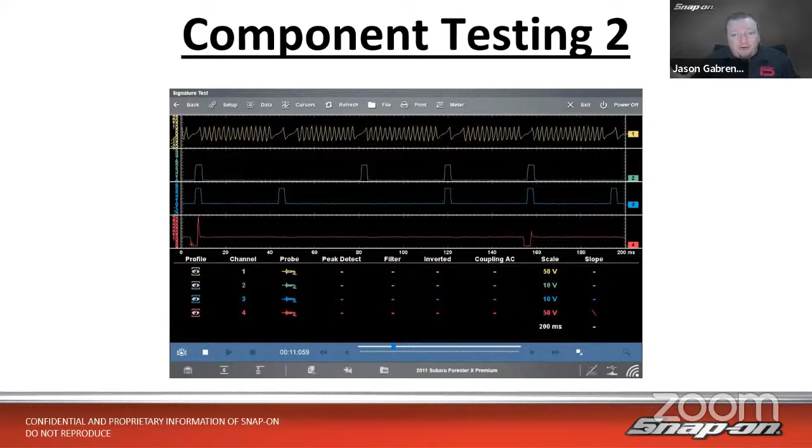So for this portion of the class, we're going to talk about a case study. We have a Subaru here with a flashing check engine light. The customer complaint is under hard acceleration, such as maybe merging on a highway or climbing up a steep hill, steep grade, 100% throttle, 100% load on the engine, the light would flash. Cruising normally though, if we're hanging out in the left lane or whatever, just part throttle, 65, 70 miles an hour, whatever it happens to be, no engine light present at all. No other drivability concerns with the car. Even when the light is flashing, the customer doesn't even notice anything's going on. It's just they see the lights flashing, and that's concerning for them, and I can imagine why.

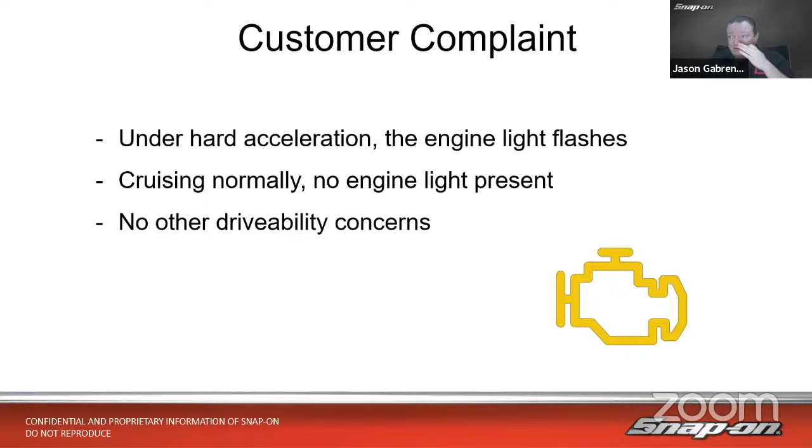So what is a flashing check engine light? It's a catalyst damaging event, usually a misfire when that's concerned. So we've got to take a look and see. Let's diagnose this vehicle and see what's going on here.

So the first thing we're going to want to do on any vehicle, if we have the ability, is we want to be able to code scan, do a scan of the entire vehicle, check the whole vehicle for codes, see if there's codes in other modules that don't have lights with them or something of that nature. So we see right here with the engine, we've got history codes, we've got a cylinder 3 misfire in history, and that would be why no engine light is on. It's in history, it already happened, but right now it's not going on. So it was in the history, and they'd driven it long enough to get it out of current and into history. So cylinder 3 misfire.

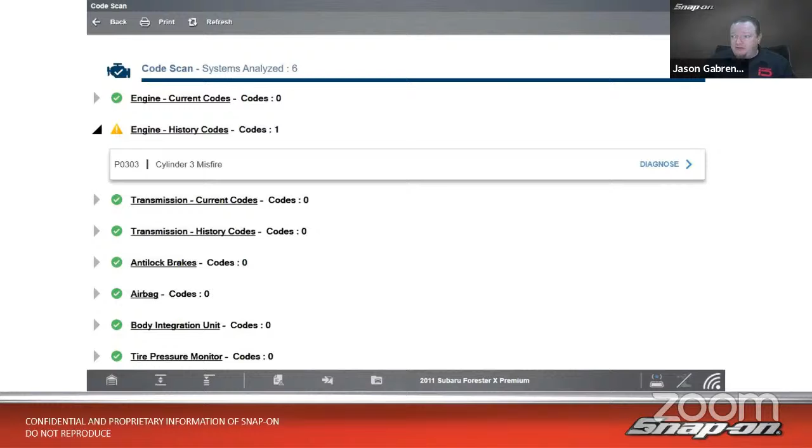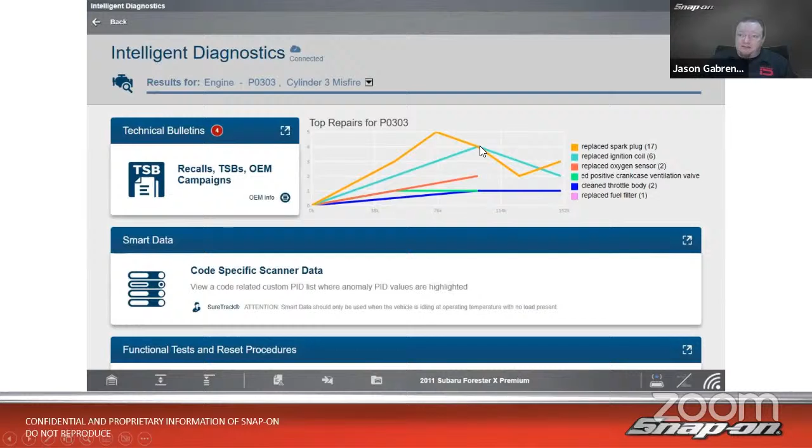So we'll select diagnose here because we were using this on a Zeus, and that has fast track intelligent diagnostics. So that should help us out a little bit when it goes to diagnosing the problem. You can see here's the landing page, and it looks like we have 4 TSBs. Now we want to use the fast track intelligent diagnostics page like a book. It's going to be a repeatable diagnostic workflow. So top to bottom, left to right, I want to be able to touch on everything on this screen, and it's going to walk me through a diagnosis. So first thing first, top left corner, it's going to be my TSBs. There's 4 of them, so we're going to click on that.

And why in the world would it cause a drivability problem or misfire or something like that? So here's a close-up look from further on in this bulletin as to what it looks like. So here's the cam sensor. It's got just the connectors up there. It's got one bolt that holds it into the timing cover. Got the timing chain cover right here. We got a little rubber O-ring, which sits in, and then it has this metal disc on the end of the camshaft that it reads.

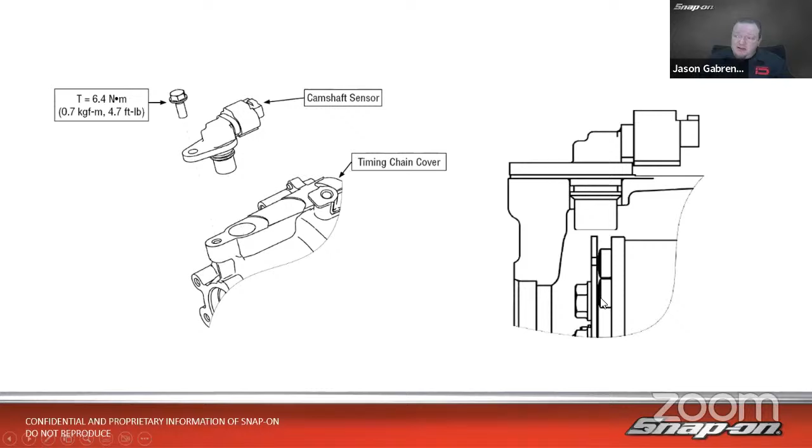So it's going to have different notches in there, depending on what cylinder's where. And you notice that there's an air gap. So under normal circumstances, this is our sensor right here. This is our wheel. So it's going to have 3 notches and then a blank or no notch.

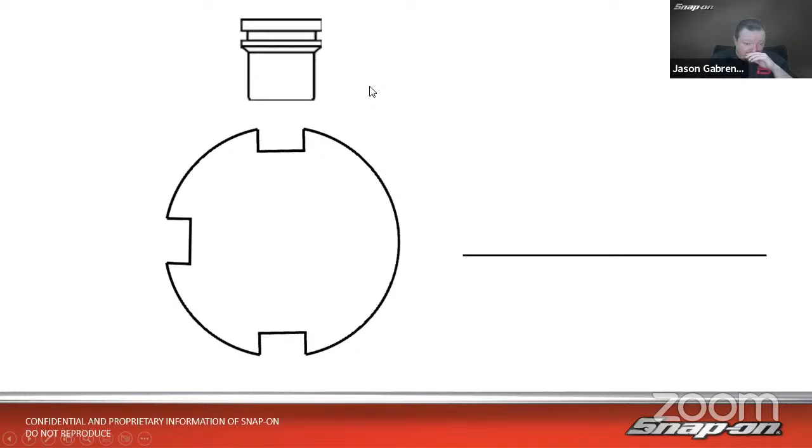The cam sensor on this vehicle is going to be a Hall effect type sensor, and it's a 3-wire sensor. So it's going to put out a digital square wave in this case. It's going to have power, it's going to have ground, and it's going to have a signal that goes back. So when it's powered up, it is going to generate a magnetic field.

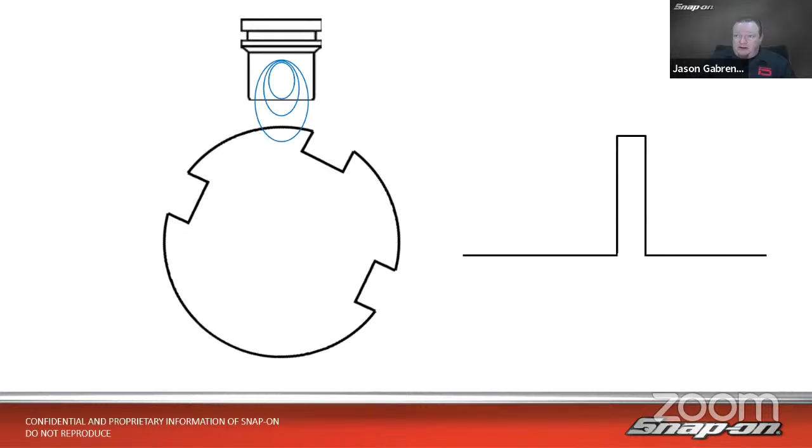Now, this isn't 100% what a magnetic field looks like. I can't really draw in 3D, but you kind of get the gist. We have these loops and these waves in here. So it's a little coil of wire. We run electricity through it, run current through it, and it generates a magnetic field. As it turns, as that disc disrupts that magnetic field, it's going to create a pulse.

So there's my pulse right there. And judging on where this pulse is and how that pulse lines up, that's what creates the signal. And that's what sends the signal to the computer that says, okay, here I'm on cylinder 1. Cylinder 2, what cylinder needs to fire next.

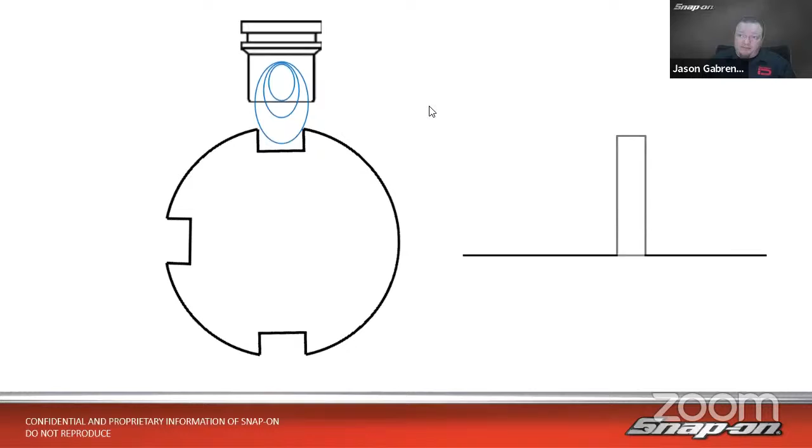However, this is if all is well and good. However, if we shrink that a little bit, we get it a little bit closer. Now the air gap is too tight, and you notice how this outer ring here, just like I said, it's just a drawing, an example, but you notice how it's intersecting that disc in a different way. So it's causing that magnetic field to change in an unexpected way. And the computer freaks out a little bit and doesn't necessarily know what is what and what's going on with the vehicle.

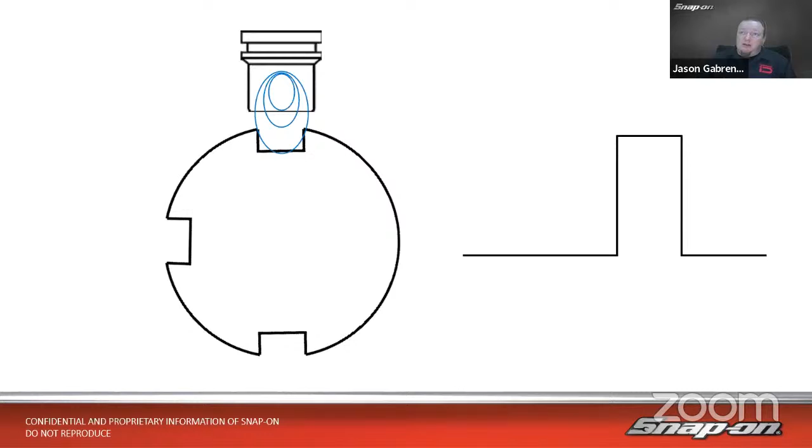So how do we figure this out? How are we gonna test this? Well, we're gonna want to test the component. Now, in this bulletin, you read through it, one of the first things it's going to show you is this pattern. Now, this is on a Subaru lab scope, but any lab scope with 3 or more channels will be able to show you the same.

Channel 1's a crank sensor. Sorry, that's an analog sensor on this car. It's not a Hall effect sensor. It's going to have an up and down analog. On channel 2, it's going to be the right side cam sensor. Channel 3 is the left side cam sensor. So it is a horizontally opposed engine.

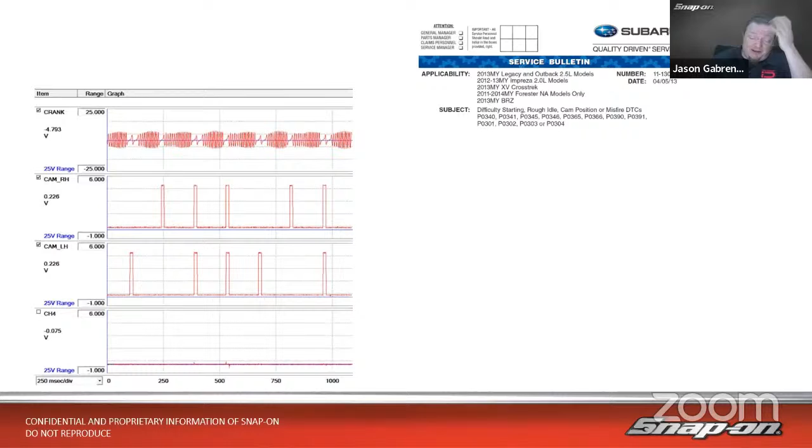So we have 2 cam sensors. If you look right here, there's a double gap, a single gap, a double gap, a single gap, and so on. So on one side of the crankshaft, it's got 2 pieces missing. And on the other side, it's got 1 piece missing. So that's way the computer knows I'm on top dead center or on bottom dead center, or 360 degrees or 180 degrees off.

So it's either one side or the other, and then you'll see there's a gap. When I have a double here and a gap there and a single there, that's one combination. If I have a single and a gap, that's another combination. If I have a double and two gaps or two blips, that's another combination. And a single and two gaps, two blips, that's another combination.

So based on these combinations, the computer knows when to fire what cylinder. So if I see this one, I fire this one. If I see that one, I fire that one. If you were to draw a straight line through all those, I think you'd agree that they all line up.

So this is a rare instance where a manufacturer actually decided to provide a known good cam crankshaft correlation waveform. Doesn't always happen. When it does, it's a wonderful thing because then we don't have to go searching.

Go a little bit further down into the document, and then it gives you this pattern. Now you see it's only on one cam sensor. You see I got the regular blips, and then I got this big one right here, and I got this medium-sized one there, and I got this little bit bigger one there. But the three regular blips still show up.

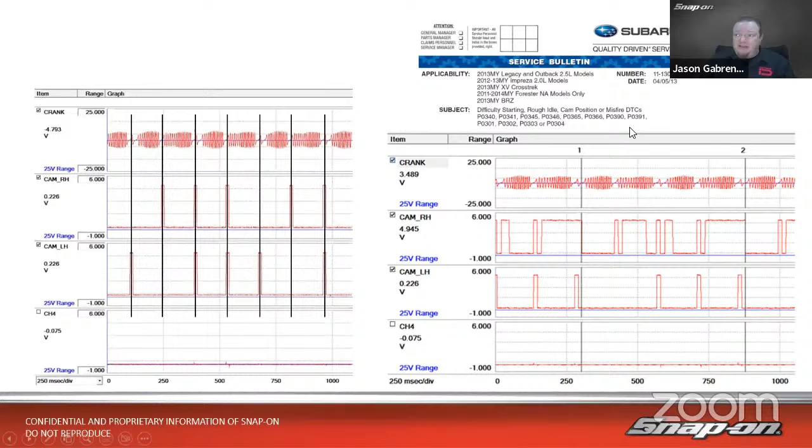You'll also notice on this larger blip, that is getting into where there's supposed to be a gap. So according to what the computer's seeing, it sees single blip, blip, double blip, blip, single blip, nothing, double blip, blip again. So it doesn't know what cylinder is what. So it gets confused and it just fires the same cylinder multiple times, or it doesn't fire other cylinders because it doesn't see that. So that's a problem, and that's why we would have this issue.

So next thing I want to do is, well, let's hook it up and let's test it and see if this car has this problem. So we're going to go into guided component test, and you'll see they do list a crank sensor, cam sensor, and ECM, and so on. The nice thing about Fast Track Intelligent Diagnostics is it narrows down all the tests on the vehicle just to the couple sensors that might be what we need.

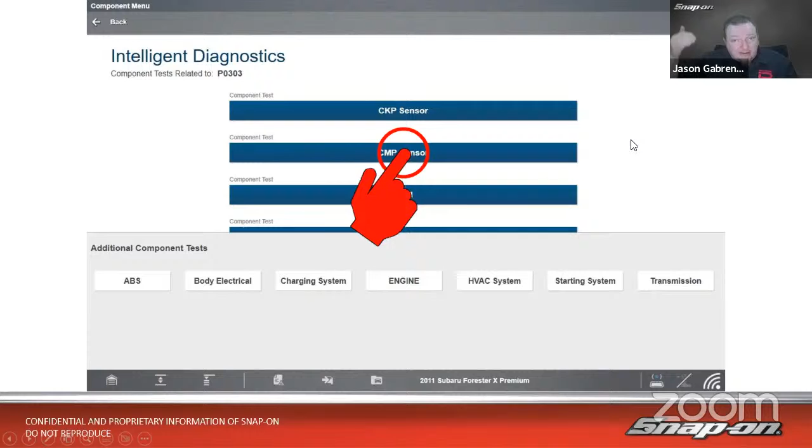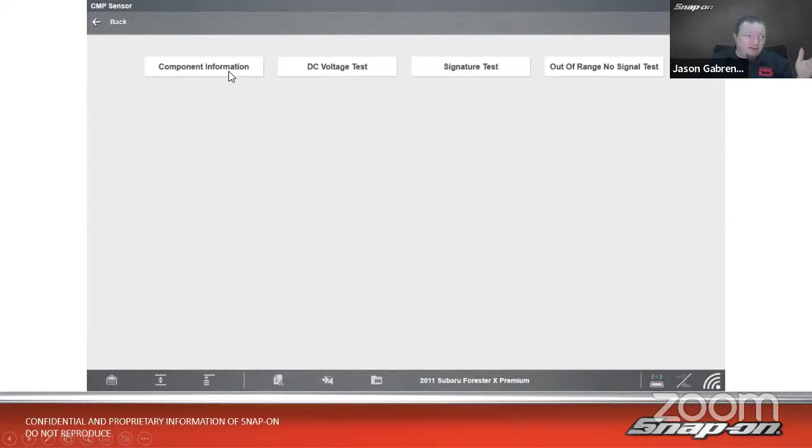So first I want to check those cam sensors because we said the gap is close. So if we see that pattern where the gap is off, then we'll know we have a problem. So we're going to go in here. We could read component information about how it works, but I just kind of told you how it works right there.

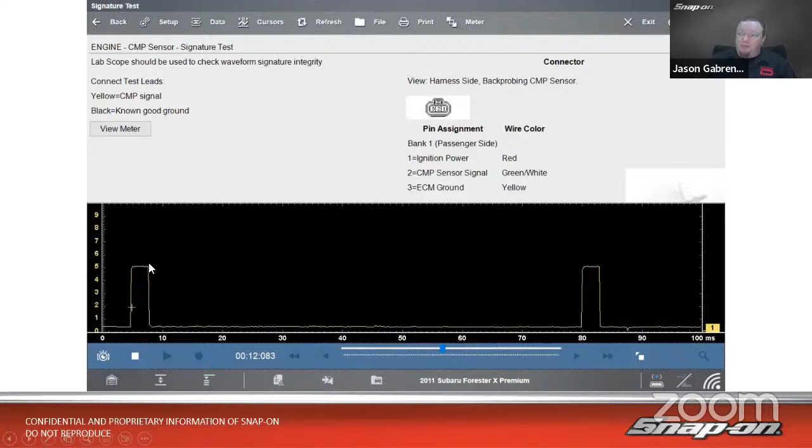So we're going to go into the signature test. In the signature test, you take a look and it may look good or it may have a gap, right? In this case, this one does not have that problem at this time. So we see we have a blip and then a gap in between, so it doesn't have that problem.

Let's look at the crank sensor too. I'm going to pull that up. And then we see the crank sensor looks normal as well. We have a double gap, a single gap, double gap, and then we have that analog pattern back and forth.

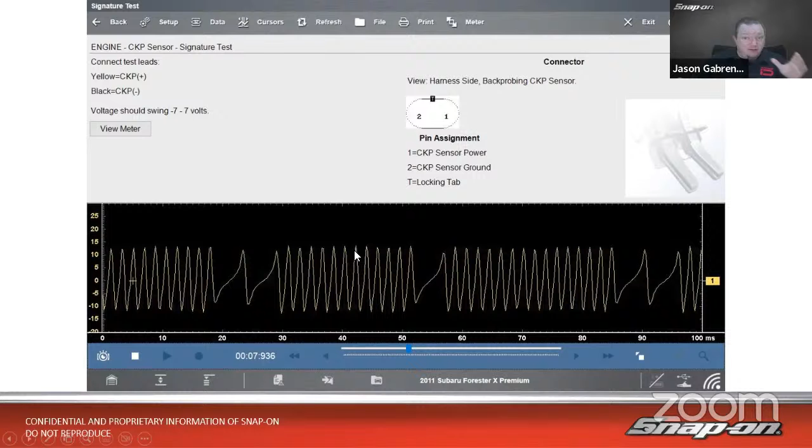Now I want to be able to compare the two on the same screen, so we can do that as well. If we go up to the meter, click on that, and open up, makes it a little bit bigger. If we come down here on the bottom, we can open up the extra channels where we can open up more channels on this scope. So you can see I have 3 right there.

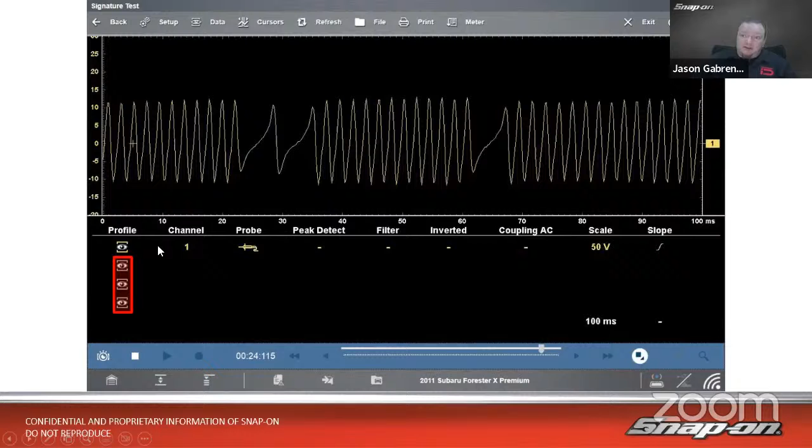Going to open up. Now I have my two other cam sensor channels there. So I have a crank sensor on channel 1, channel 2 is one of the cam sensors, channel 3 is the other cam sensor. And I can see how they line up. So I have a single, a gap, a blip, single, blip, blip.

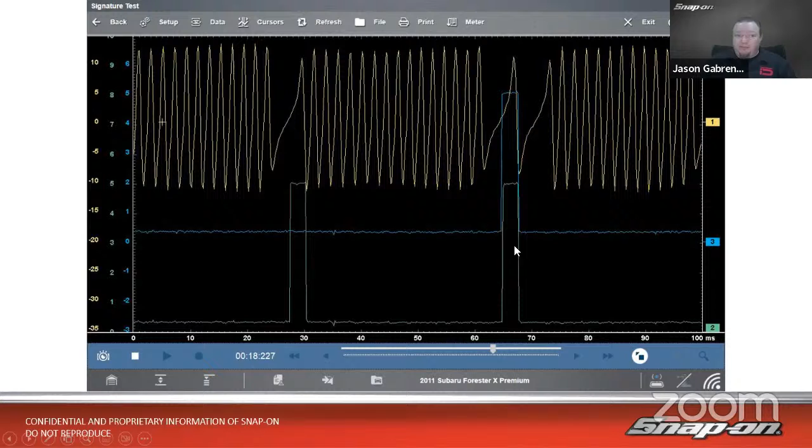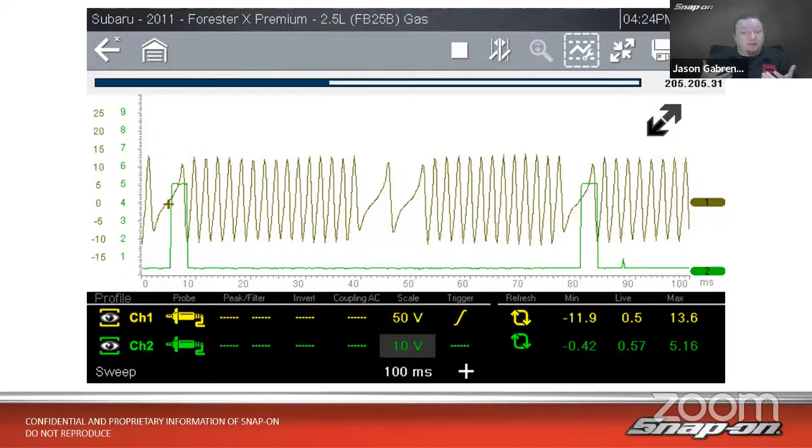Could also do this on a 2-channel tool. This is on a 4-channel tool on a Zeus, but I could do this on a 2-channel tool as well. I just have to look at one cam sensor at a time. So if we know we're looking at a cam sensor problem, we can do one cam sensor at a time, or both cam sensors at the same time, just without the crank sensor, making sure everything lines up. We can do that too.

Went one more step further because I wanted to be able to see one single pass of the firing order, so I added an injector. So the injector fires lined up with all of these things. So if I use that 4th channel as an injector and with the trigger point on that, it's going to base everything off of that time-wise.

And that's one of the important things. If I'm using multiple channels on a scope, I want to have them all on the same time base because I want to be able to see and compare and not throw my brain off, I guess, if I have different time scales going.

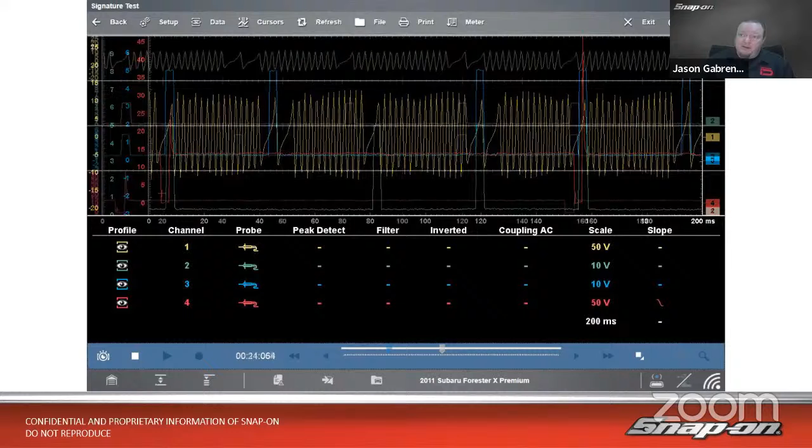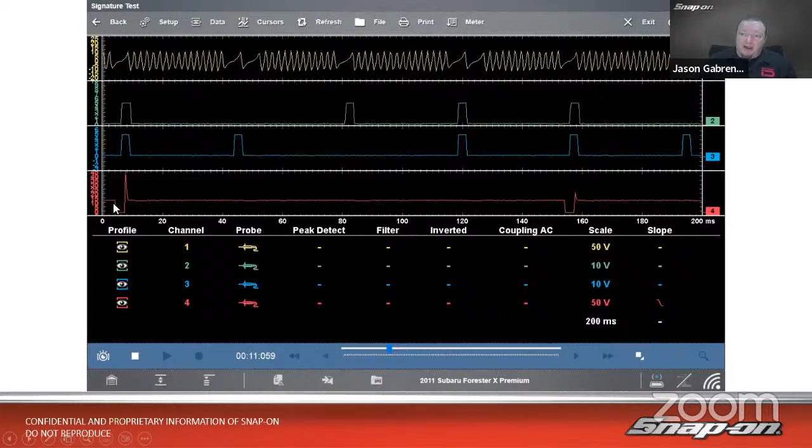When you're comparing multiple channels, you want to have the same time base on all of the channels in order to have that comparison and not have it skew your information. We can take it one step further and separate them out, kind of like Subaru had it already. So we have the crank sensor there, one cam sensor there, and my injector pattern right there. I could take it even another step further and open both on the same screen at the same time.

If I have a Windows-based tool, I can open the cam sensor on one side and have my information on the other side. In this case, we have our TSB still open, and we can do that all on the same screen, all at the same time. So that is the use of multiple channels.

Now let me back up a little bit. So we tested it and saw how it worked. And how do you fix it? How do you fix this problem? I shouldn't just leave you hanging and say here's how we figured out the problem. We don't know how we fix the problem yet.

So what happened is this was the first year of that engine for Subaru, as I said. And what happened is when they machined those surfaces on the cam or the timing covers, they machined a little too much off, so it brought things a little too close.

If the gap was very, very tight, you'd have starting problems, lots of drivability problems, hard start problems. In the case of this vehicle, it was just barely on the edge, like it needed a 1/10 of a millimeter shim. Under a load, when things move, it gets a little bit closer and throws the problem. Driving down the road at just part throttle, it's got the right gap, so we don't have the problem. Just right on that edge, if there's enough stuff moving in the timing chain, with forces moving around, it gets a little too close under a load. Not under a load, it's fine.

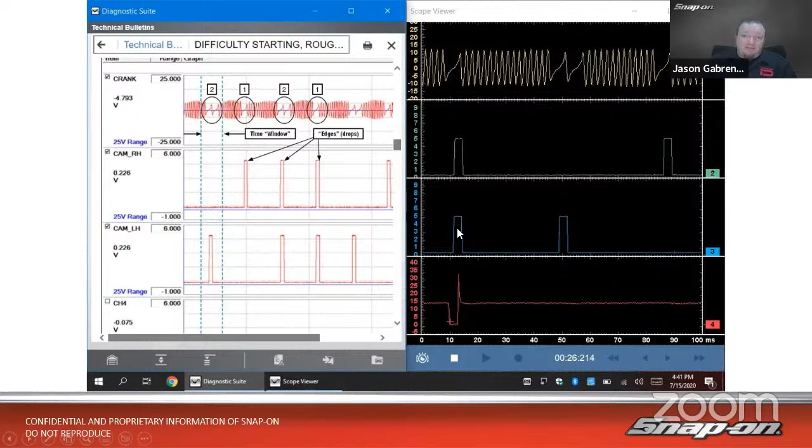So in this case, that's what happened. You put a 1/10 of a millimeter shim in there, and you're good to go. I just thought that was an interesting, good example of multiple channels and how we'd use that. So that's what we're going to talk about now, how to do that.

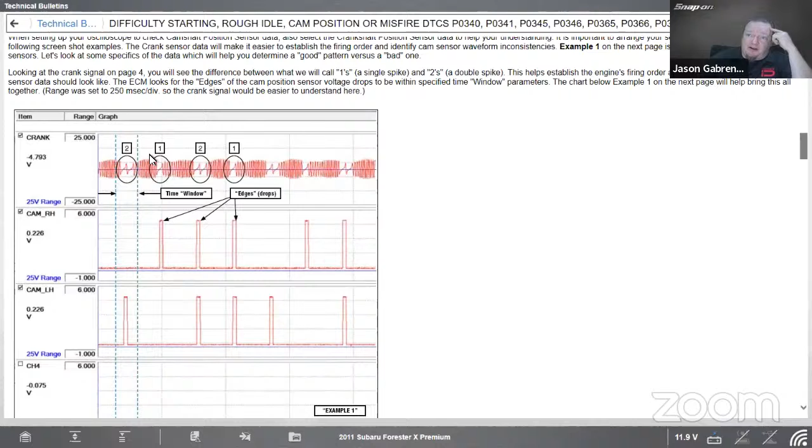Special tools I need: depth gauge adapter if I need it, or if I don't have certain things, the washer there. There's my known good pattern, and it talks about this double gap and the time window we need to have a pulse occur.

That's where we said if it got screwed up. Right now it's pulsing the way it should, so it would be 1, 3, 2, 4 is the firing. So if it sees a certain combination, it's going to fire that cylinder. If it sees a 1, a yes, and a yes, then it fires number 1. If it sees a 2, a no, and a yes, then it fires number 3, and so on.

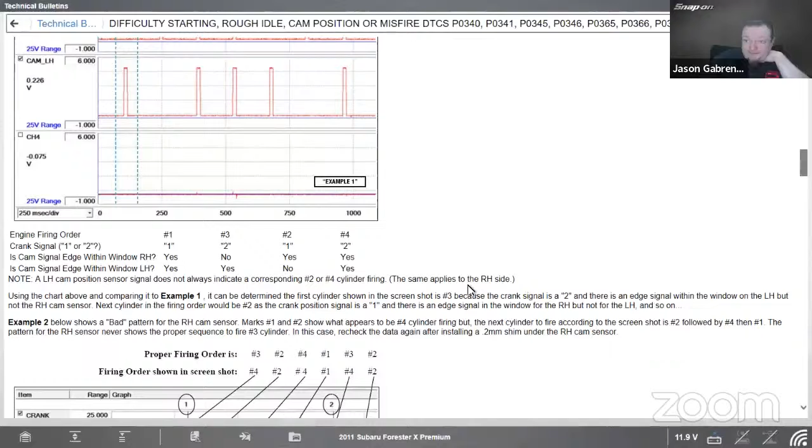When we have the problem, we see the erratic signal - we have this extra signal there. It should be shooting 3, 2, 4, 1, 3, 2, 4, 1, but instead it's 4, 2, 4, 1, 4, 2, 4, 1, not even firing cylinder 3, and it's getting the signal to fire cylinder 4 twice. That's why we have a misfire problem.

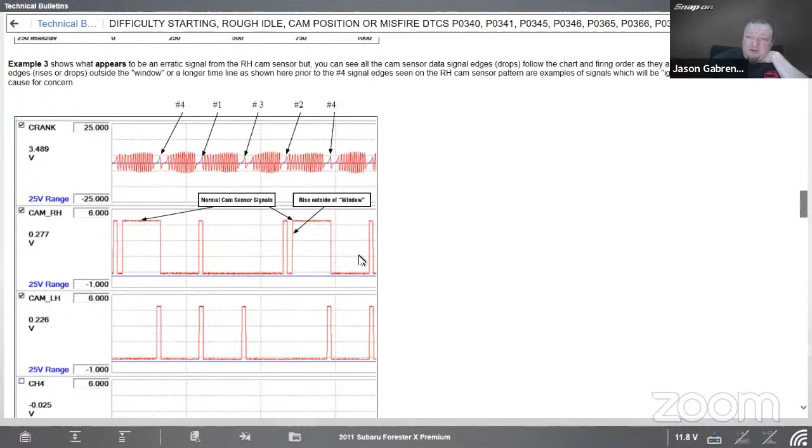It appears to be erratic, but it's not. In this case it looks erratic, but it's still okay because it's just outside of the window. So it still works - it's still not right, but it's not bad.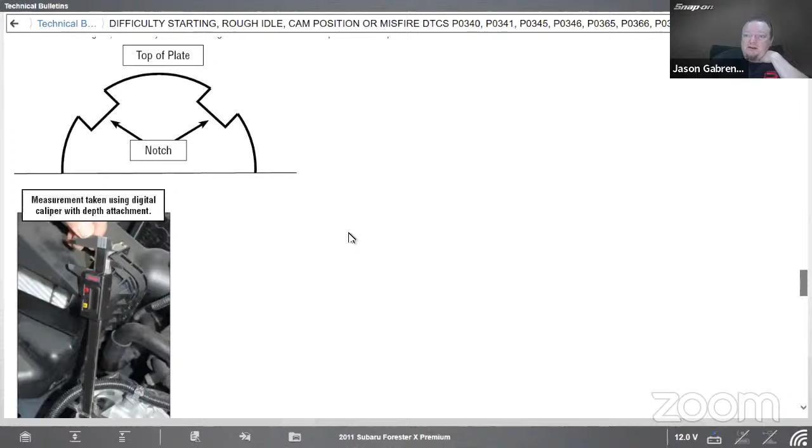If we come down here, we can see the cam sensor, and we can see the shim where the shim gets added in there. Make sure that our depth is correct. Top of the plate - there's the notches. We want to take the depth to, not the notch - we want to take it the other way.

It's going to tell us how it works. Do a little bit of math, and so on and so forth. So it gives us the time down at the bottom.

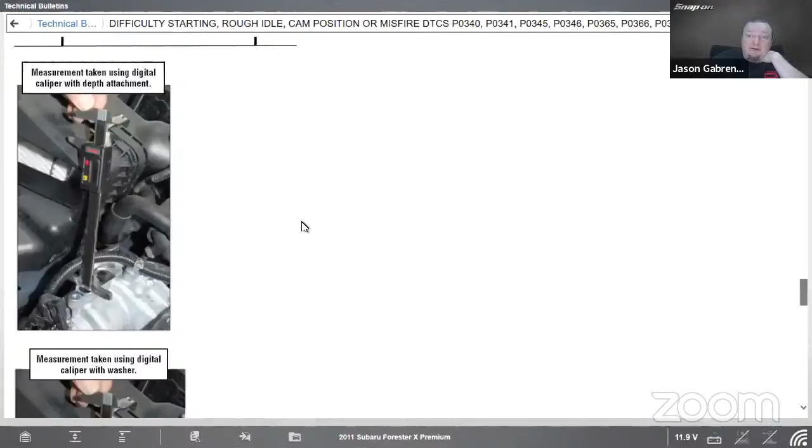All right, so here's my known good pattern. Now I want to be able to have this on the screen, and when I'm done going through this procedure, I want to have my cam and crank pattern on the right-hand side so I can see that going back and forth.

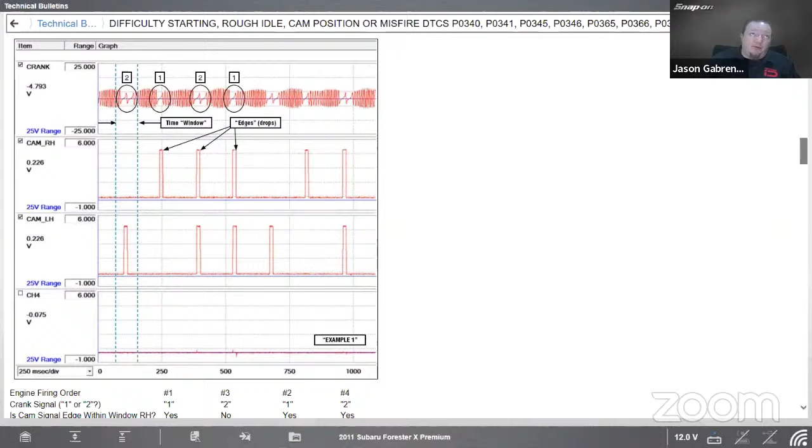To do this, since I have a Windows-based tool and my TSBs are in my scanner, I'm going to leave that going. Go to the home screen, go to my guided component test. Load my vehicle, I'm going to engine. Once I load the engine, it's going to list all of the components or subsystems that I can test.

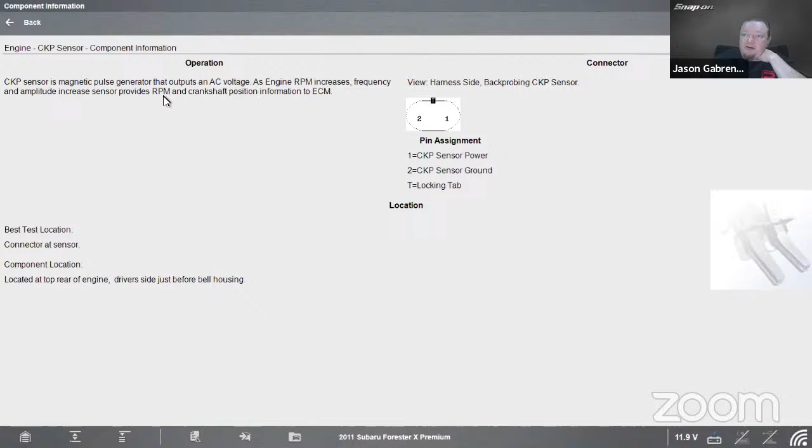In this case I want to start with the crank sensor. If we look at component information, it's going to tell us it's a magnetic pulse generator that outputs an AC voltage. As engine RPM increases, frequency and amplitude increase. The sensor provides RPM and crankshaft position to the ECM.

Back up a little bit, and we go to the signature test. So we connect yellow to crank positive, black to crank negative, and it should swing -7 to 7 volts or more depending on RPM and such. So we're going to have our sensor go, and we see it's about 7 to -7.

There's my crank sensor - I see a single window, I see the double window. Everything's there, everything looks the way it should. So it should swing -7 to 7, or about -7 to 7, maybe a little bit over, but that's okay - that's what it's supposed to be.

All is good here with the crank sensor. Let's add in the cam sensor. So we go up to meter, turn it up, makes it a little easier to see. Come down here on the bottom, going to expand our information here.

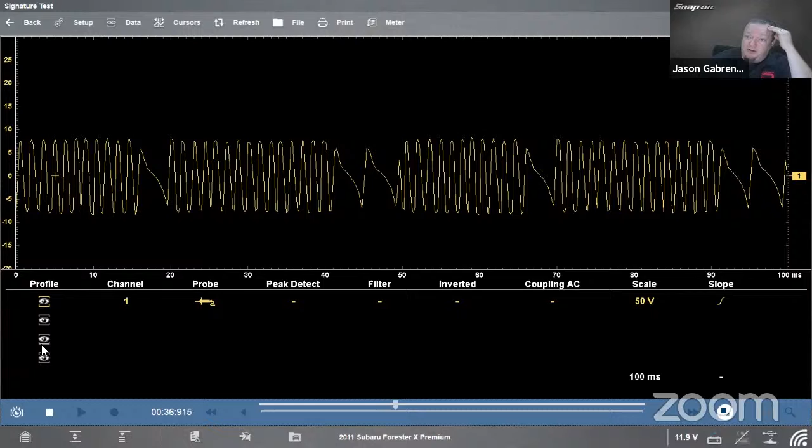I want to turn on a couple additional channels - cam 1, cam 2, there's my two cam sensors. Now you see I have one cam sensor up there, but what's going on down here with this green line? Why don't I see that?

So what it does is the guided component test will automatically set the scale for whatever you're testing. Everything else is going to be wherever it is when the preset was saved. In this case, channel 2 is set to 400 volts, so I need to change that down to more like 20 volts to match this cam sensor. I'm going to click on that, change it to 20. There we go - now I can see they're kind of flipping by, kind of lined up.

Got a lot going on here, though, because normally it's probably going to present itself more like that, and it's going to be a little hard to see what's going on. Got a lot of stuff on the screen, a lot of stuff going on.

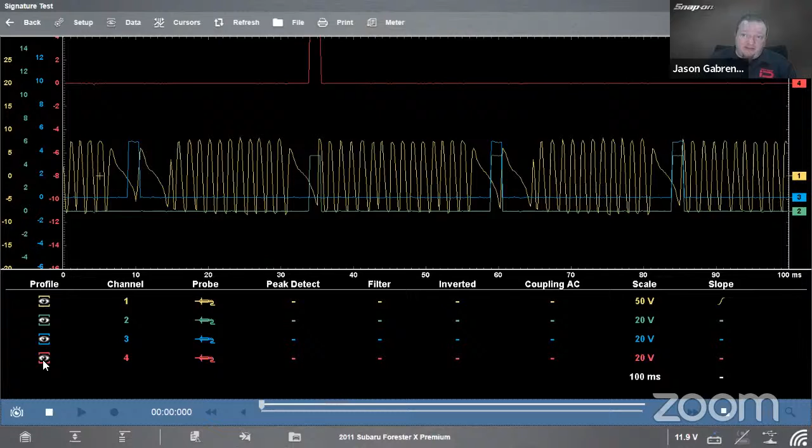Next thing I want to do is add a 4th channel. In this case, we'd add, say, an ignition coil or something like that. So this is just a square wave pattern. I could put an injector on there if I needed to as well.

But this is what you want to do when you're doing this. You want to find one pulse that happens once in each firing, so that way I can line everything off the back end. We look over here, we see the slope, and I see it's catching it on the yellow channel. I want to move that to the red channel, so I'm going to come down here and just click on it that way. Now you can see it's catching it on the red channel. If I move it around, my whole pattern's lined up. It moves accordingly. If I wanted to move it over here to the right, we can do that, and the whole pattern moves accordingly.

So in this case, I want to see one time in the firing order, so I'm going to put it over here on the left. We're actually in a little bit, but that's okay, so we can see that's where the next one's going to fire over. So I can see the pocket here, the pocket there, the pocket there. See all 4 firing at the same time. Now, once again, a little difficult to come in here. A lot of stuff going on, a lot of different colors, and they're kind of blending together.

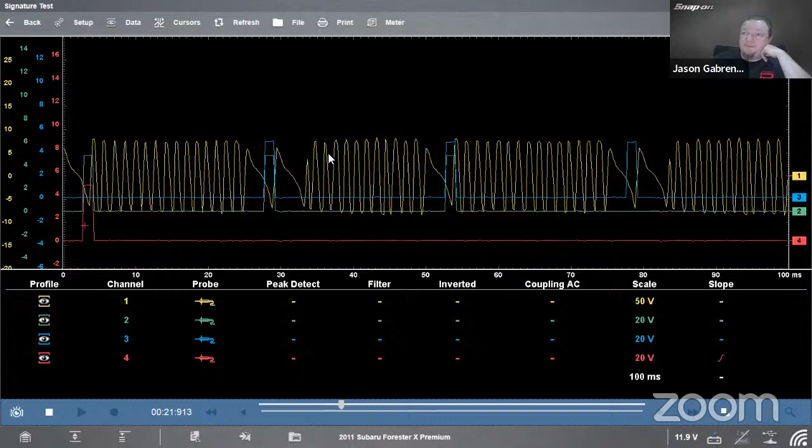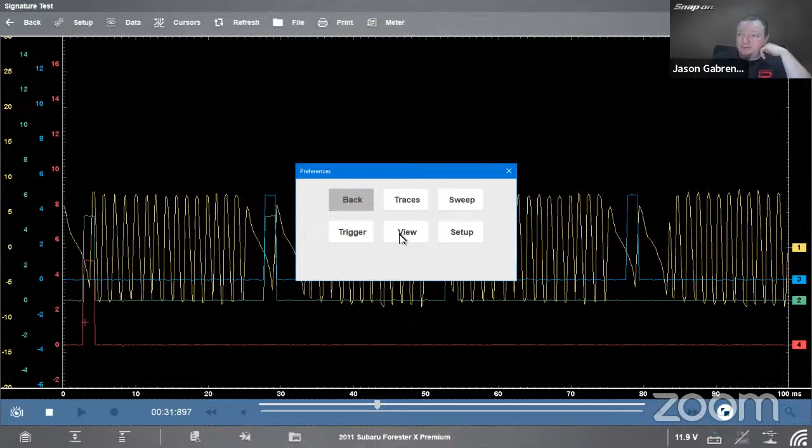So I'm going to clear this out so I don't need to make any changes in it. I go up to setup, and I go to view, and I go to layout. I can set it to have 1 window, which it is, 2 windows, 3 windows, or 4 windows. So I go to 4 windows. There's my layout that I was looking for before. So I have channel 1, channel 2, channel 3, and then my 4th channel for a trigger.

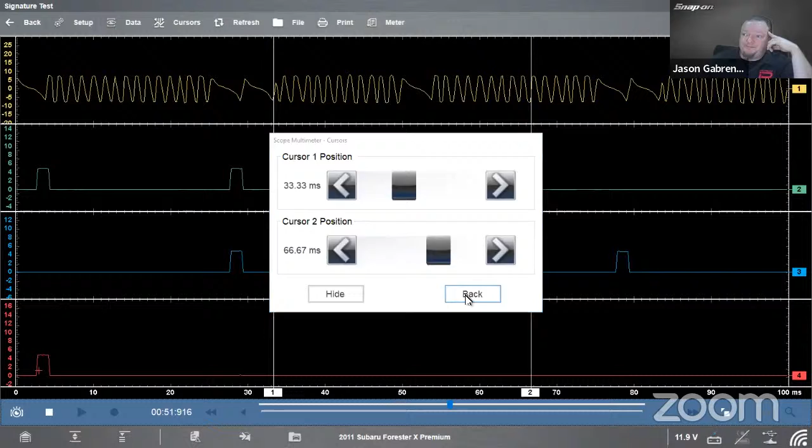We also wanted to turn the cursors on, make sure everything lines up. So that all lines up there. That all lines up within the window as well. It's supposed to be before that gets all the way down to the bottom, so that lines up in the window, and then same with over here. Everything looks good, the pattern looks good. So in this case, the car would be in good shape for that.

So that's a kind of a little bit more advanced take on how I would look at things. Cam and crank correlation. You can do this for fuel injector voltage, amperage, and pressure. We've done that before on one of our classes, so you can see how the current flows versus the amperage and the pressure.

How about looking at in-cylinder pressure? You're going to see the compression event with the pressure transducer. You can also add in a coil to see where the coil is firing as well, so you can see how it fires before or after top dead center, and so on and so forth.

So using multiple channels is definitely helpful when it comes to getting these comparisons, especially these time-based comparisons. If one of these camshafts was one way or the other, either advanced or retarded timing on that one camshaft, because we can have variable valve timing problems that we could diagnose this way. We can see, is it shifted to the right, is it shifted to the left, which way is my timing belt or timing chain stretched. Any of those options can be done or looked at by using multiple channels with a scope guided component test meter.

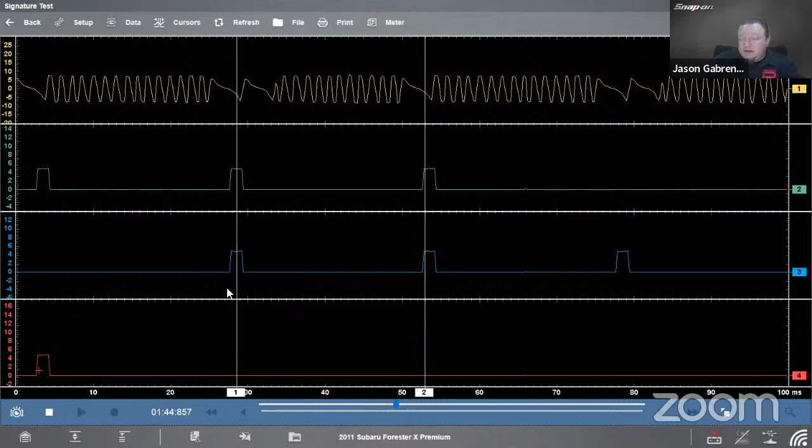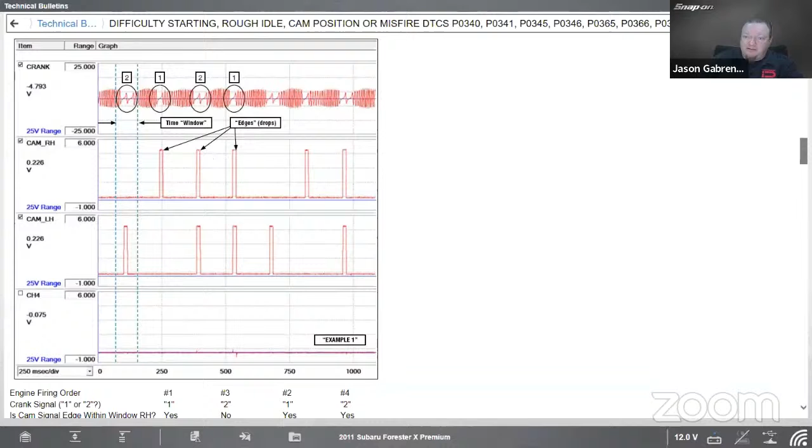Now, one more thing we wanted to say, we wanted to have this on the same screen at the same time. Once I got it set up here the way I want it, I'm going to go up to meter again, makes it a window. I can then go back to my scanner, I can see this on the left. I'll pull up my taskbar down here on the bottom, pull up my scope, snap it to the right, snap it to the left.

And then we can see here's my known good on the left, here's the pattern I'm getting on the right, and that pretty much looks the same. So I can compare: here's my known good, here's what I'm currently getting on the car. All looks good, all is well.

So with that, that's talking a little bit more about our advanced setup. Let's take it to the next level. Let's add another channel, add another couple channels, add another 3 channels. In this case, that's how we got to it.

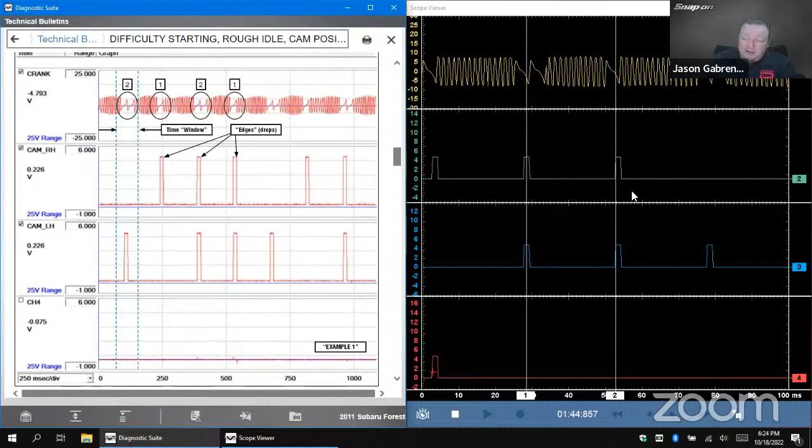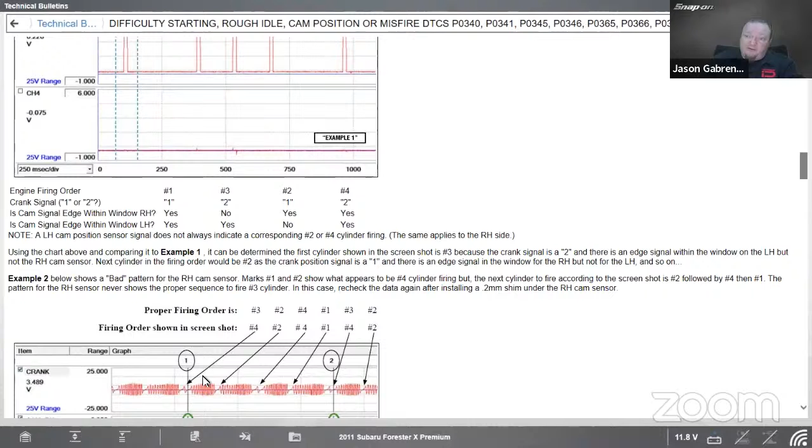Hopefully you learned a little bit more about why we would want to do that, and a little bit more about how to do that if you have the right tool for the job. You also could do it on a separate scope. If you had a separate scope and scanner, you could put them right next to each other and get the information that way as well if you wanted to do it that way. So a lot of ways to skin a cat. It's just seeing, here's how we can do it, here's why we want to do that, why would I want to use multiple channels with component testing as well.